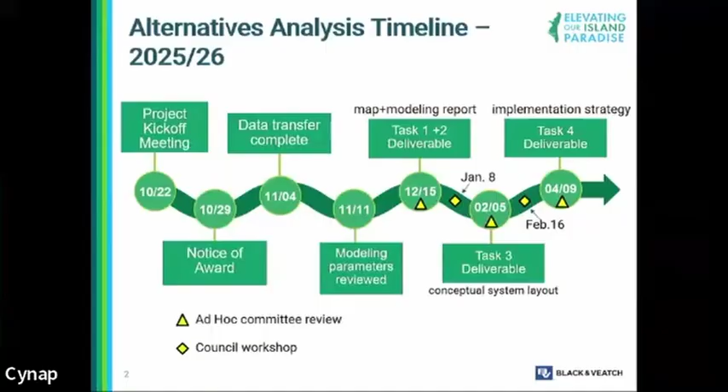Moving forward, in February we have a conceptual system layout deliverable. In between that, we're going to have workshops with council. The triangle is the ad hoc committee review, which is essentially now, then the council workshop in January, and then in February timeline, somewhere around then, we'll probably do another council workshop to discuss the conceptual system layout, and then ultimately moving forward into April with the implementation strategy, cost estimating, and final report end of April.

As far as I know, everything seems to be moving along on schedule. At some point there's going to have to be a decision as to what to do beyond that.

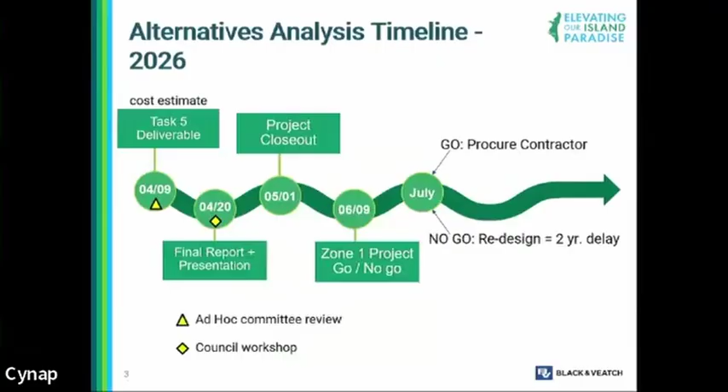In terms of the Zone 1 design as we have it now, everything's falling into place such that all the permitting will be done, all the procurement and bidding package will be done. We got the South Florida Water Management District ERP today. Financing is in place, and so then a decision will have to be made as to which direction to go as far as this effort is concerned and the management of the effort.

Sure, but I do want to add - as you set that up there, Rowan - I want to let everyone know, after a whole bunch of wrangling and a whole lot of effort, Colleen pulled off about a $13 million grant, HMGP grant, for the Garden District. So we got notified on Friday. Where's that from? HMGP is a FEMA grant. It's a FEMA thing we were expecting. Yes, but it originally went to $3 million and after, $13 million.

But that was the one that was in doubt. We had it, then we didn't - it was in very much doubt. Yes, now it's back. Yes, and so we got verbal approval on Friday, and also to her credit, the Resilient Florida application that we submitted, we're ranked number 11. Yeah, and they know that. So obviously that's contingent on the state budget, but good news.

So she's been - it's a 90% grant, we pay 10%. Yes, correct. So if we spend less, they give us less. It's up to 13 million, but it's all based on what our estimated project cost is. The original estimate was much lower than that - it was about 3.6 originally. Then it went to 7.8. Then it went up to a project cost of 14.9.

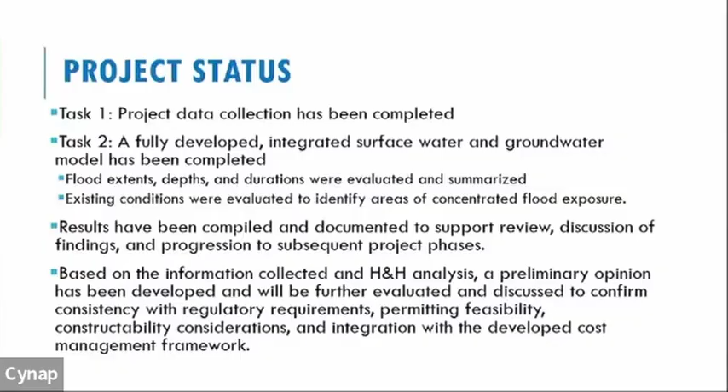Here is our timeline. We're currently in the first deliverables, and after the first tasks, we are ready to proceed with the next task, which is the conceptual network design.

The conceptual network design will require—we have developed an initial model that includes all of the infrastructure, including catch basins. We have more than 700-800 points within the model that are coupled with the surface water and with the groundwater.

When we talk about conceptual pump network design, we'll initially come up with some suggestions and implement them in the model. We'll test how they perform, then look for optimization. The conceptual network design will be the most important part of this project, because it allows us to test different conditions and see their impacts. That's really the essence of the entire work.

We're ready to proceed with that. In parallel, we have been doing preliminary budget cost estimates, and I can say that they vary significantly. I have a separate slide where we'll discuss what these variations mean and how they should be reviewed.

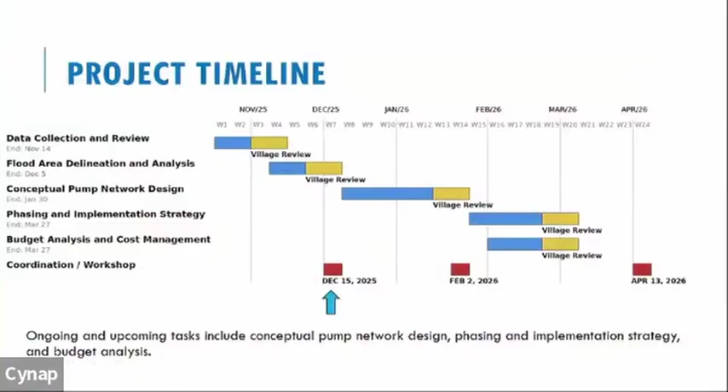The only reason I'm saying that is by looking at the golds added to the blue, I see with the first two they're overlapping, but then I don't see any overlap between 2 and 3, or between 3 and 4. So to me, the village review between 2 and 3, and 3 and 4, is going to hold you up. Is that correct? It depends on the reviewers. I think if we agree... So my next question would be, how can we speed up the review so we don't hold them up?

Well, first, these things are really more horizontal lines than vertical lines. He just did this to make it simple, but you can also see we've got the checkpoint today, which is December 15th. That's kind of a checkpoint to move forward. And then the next checkpoint is for the ad hoc committee for review on February 2nd. So you can also see that impacts when we kick off, because those are significant decision milestones that allow them to go to the next step.

So I guess the next milestone is the big one. Yeah, so not only is it just the review, it's also an opportunity for the ad hoc committee to get their presentation and see it as well. But if you were to draw this, it would be more like stripes, because we're back and forth constantly with them.

I'm sorry, continue. You said to ask questions as you went along. Yes, no, that's a good question. Thank you.

We're in the background actually working on the phasing, on the budget, and everything. We're not going to present it at this point, but we're working on it. I think what Ed's driving at is we're not holding you up with anything, as long as you're fine with us reviewing the data, because when you look at such a short-term period, it's not realistic to stop review, and I haven't worked for an agency that does that.

So conceptually, the correct thing is that we have the key milestones that we present to the council members, and that's the important portion.

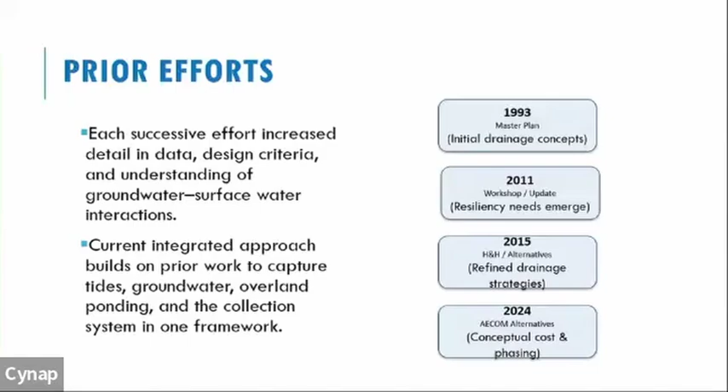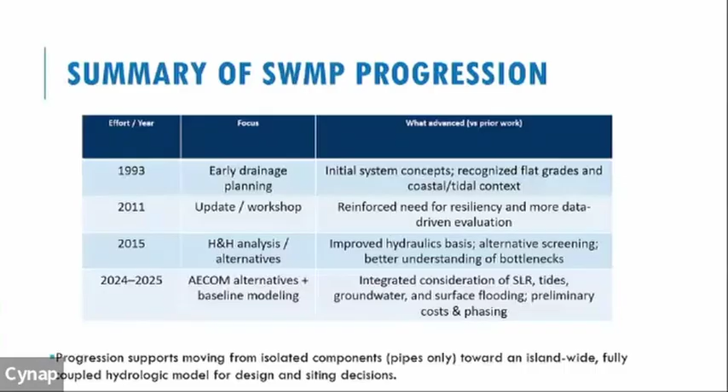And this is a summary of the Stormwater Master Plan progression. We have utilized the data from all the previous studies, and this is the basis of our analysis.

It's important to mention, because we're talking about this modeling, that we're not simply looking at this as another modeling exercise, but we're looking into adding the entire hydrological cycle. There are multiple reasons for the need to include the entire hydrological cycle—meaning the tidal effects, the groundwater, and the evapotranspiration have to be included. Being in a tropical island, evapotranspiration is one of the main components of the water budget; even though it doesn't directly participate in flooding, it's essential to maintain the balance in the soils, so that's also added.

Can I ask you a brief question? When you mentioned the hydrological cycle, one valuable discussion held in the past in this council has been the fact that we are going with standardized curves done by the South Florida Water Management District that were set in 1960. You know that, right? The 25-year, 3-day. One of the things I remember when we did the first stormwater master plan was that we wanted those curves to be reevaluated.

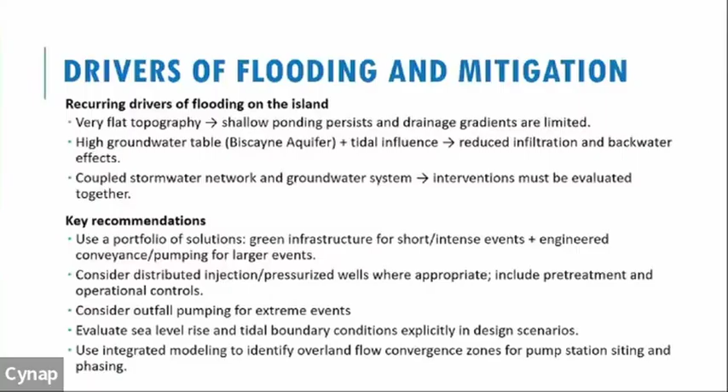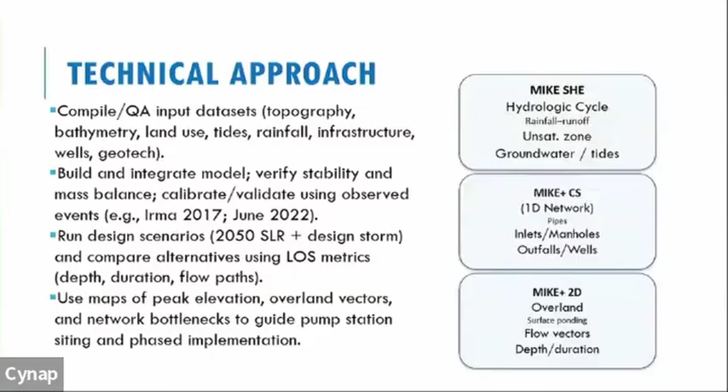But the hydrological cycle of Mike She, are you using that for sea level rise too? For Mike She, yes, we're using it. Is the sea level rise an exponential rise, or more of a chaotic, stochastic rise? I have a little slide. I'm looking at where we looked at the intermediate as per the RFQ, and I'll show you a slide.

We downloaded all of the data from Virginia Key and placed it. It looks so far linear, so it's more going through the low intermediate. But considering we have a very short period of analysis, it's only preliminary.

So the full hydrological cycle is needed because the groundwater, the superficial aquifer, contains the Biscayne aquifer. We know that it's very pervious, so that's a positive aspect as well. Even for injection, you have less resistance, so you can have higher rates.

The tides are important to include because they basically propagate through the groundwater, and the tidal elevation causes groundwater elevation to rise. So for the design, we needed a model that provides a solution to analyze the tidal conditions, the groundwater conditions, the surface conditions, and the network—all four components.

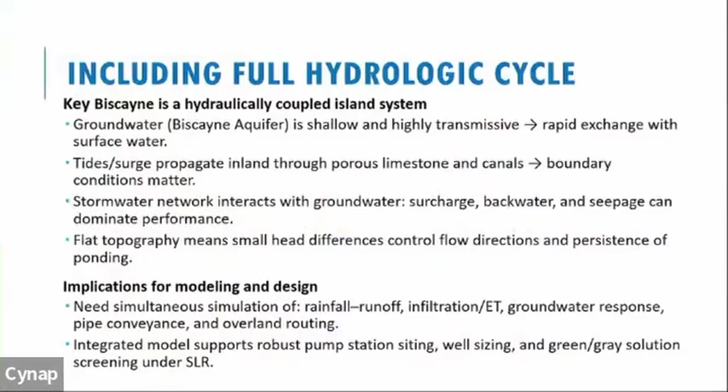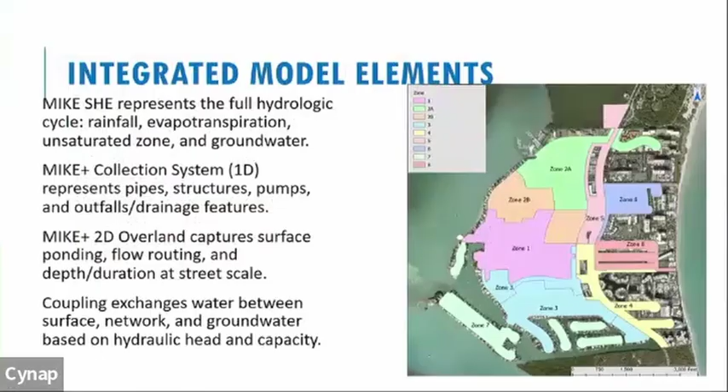So the integrated components include all three of these. This is the original zoning developed by AECOM. Here are the model boundaries in this slide—I show the model.

The blue areas are the model boundaries, and you can see we went through to the coastal area because this enables us to provide the impact of the tidal conditions. We also went to the north, where there are wetlands, because if there's a way some of the flows can be stored, a storage area could be developed there for analysis.

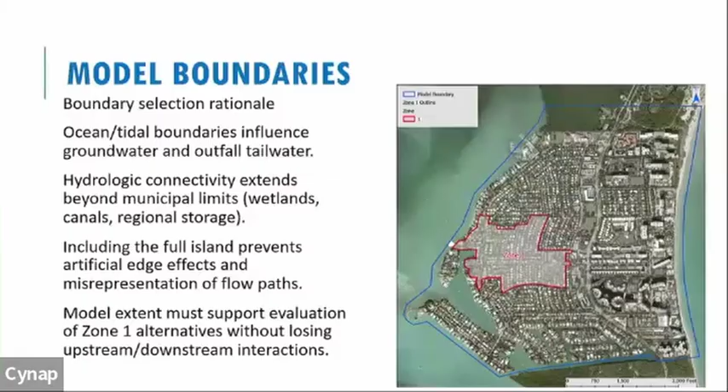One reason to include the full island area is because in this flat area it's impossible to define watersheds. Also, this model is discretized at 500 by 500—actually more, 1600 by 1600 cells—meaning we have a discretization of 5 feet, very detailed. That's a sufficient level of detail to model the topography on the streets as well, giving us detailed analysis of the flows on the streets.

For the data sources, we only use published data. Topography, bathymetry, and land use are from Miami-Dade County. Land use from Miami-Dade County is a bit different from South Florida Water Management District's, which is more vegetation-oriented—land use here is more urbanized.

The tidal data is from the NOAA tidal station. For rainfall, we use Atlas 14 for the event, but distribution is based on South Florida Water Management District distribution. For groundwater modeling, there are no groundwater monitoring wells—that's something we are extracting from the model.

We can define that: the stormwater network, the as-builts, AECOM data sets, and also the most recent KCI survey. It provides a very detailed topography and infrastructure survey, which we entirely used. However, it was deficient in the north and the south. We only received the intermediate side, the medium, which covers entirely zone 1. We're still expecting additional data, so we will provide refinements of the model to the north and south as we receive them. They promised, and we received the latest data from KCI in November, just a couple of weeks ago. They will be providing additional data for phase 2.

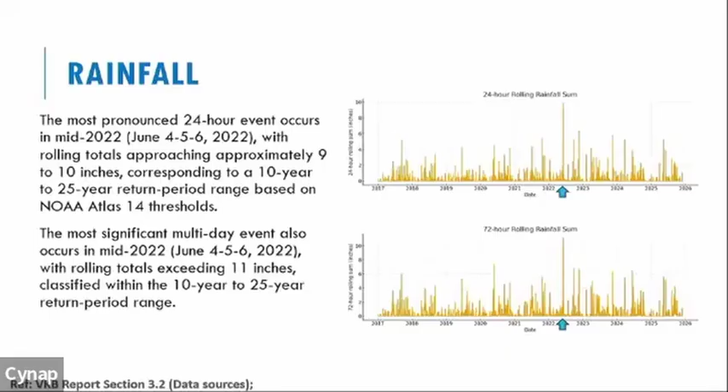But the point you're making is the intensity. That's where I'm going. Everybody knows a hydrograph is a parabolic curve. If you were to develop a hydrograph, the peak of the storm, we know what the South Florida one is because you develop it from the intensity, etc. If you were to do the same thing for Key Biscayne, would they overlap? Think of two parabolic curves, one from South Florida and one from Key Biscayne.

They would not overlap, for sure. They would be different, but it would be scientifically correct based on data. Scientifically correct in the aspect that this event is classified as almost a 25-year event. The total rainfall is classified by... more or less. That's what I'm trying to understand. Maybe I shouldn't have asked the question.

Because there are two aspects: one is the rainfall depth, and the other is the distribution. So if you have a rainfall depth of 10 inches, it can occur randomly and accumulate over 24 hours to 10 inches. But it can also occur synthetically, like a smooth curve, which is the South Florida district approach, and still accumulate to 10 inches. So that's the difference. But within the curve, they will show different intensities.

So the intensity is something that would be different. Otherwise, would the rainfall depth be more or less? In the South Florida Water Management District, it will be more. In Key Biscayne, it would be less, most likely. Most likely, yes, because in general, the South Florida Water Management District developed the rainfall analysis in the 90s and haven't developed anything since.

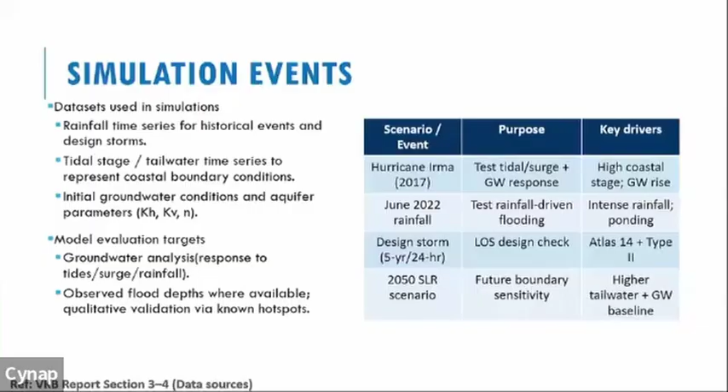And it falls more or less between NOAA intermediate low and NOAA intermediate - which is the one we adopted, NOAA intermediate. So I think it's a good choice for now, versus low intermediate or high. The point is that sea level rise has to be monitored continuously, and adaptation is necessary eventually if it increases.

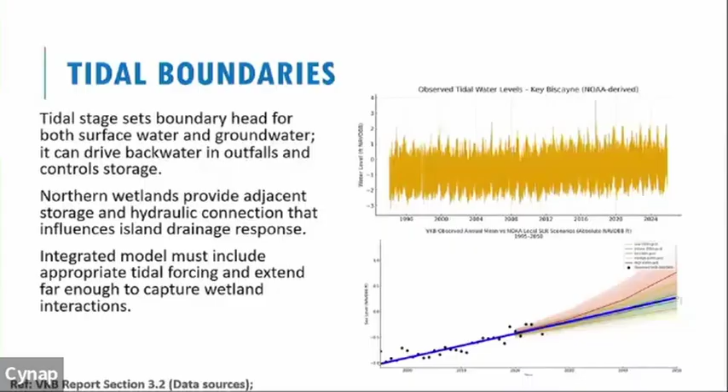I'll continue with this - the data sources of the hydraulics. I mentioned there were 3 basic sources, all bringing different components: the KCI survey from November 2025, a couple of weeks ago; Miami-Dade County and FDOT, who also provide some data, mainly along Crandon Boulevard where it's their responsibility; and the GIS data for the Village of Key Biscayne, which supplemented these areas and the lower areas. You can see the density of the network that was designed by KCI.

One thing that's important to note: in the civil drawing, there were 210 catch basins. According to the survey, 136 appear to be plugged - this is a significant number currently plugged or not functioning, or functioning at less than full capacity. This is by the KCI survey, noted in their drawing. But does plug mean 90% plugged, 50% plugged?

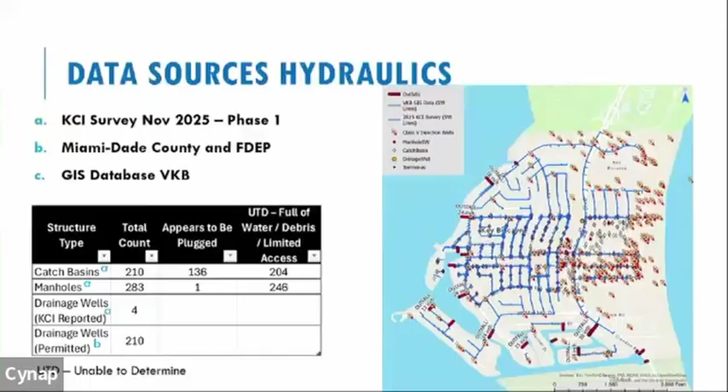This data says drainage wells, we're saying 4, but these are actually 4 injection wells. So we're calling them drainage, they're calling it drainage, but they're 4 injection wells - drainage gravity or drainage injection, two types. Are there any of them usable? I mean, gravity wells obviously you have to have a natural head to drain and you have to overcome the pressure coming out.

Are there any of these salvageable for... I mean, pressurized? They can be converted if we wanted to. Conversion is possible - I have listed a project here that was recently done in Sunny Isles, conversion of a gravity well into an injection well. This is something that's being done with a small pump, and that's an example, this was done very recently. In terms of cost and everything, it's a good example.

For localized flooding though, I mean obviously - yes, for localized. Because one thing that people need to know, and that's important, is that these wells are spread throughout the village. The area we're focusing on is a specific area where I don't think there's wells there, but it could help other areas in other locations.

Zone 1 has 6 pressure wells, 6 out of 34 - we got them on the map. Right, but what I'm asking is more of a generalized village-wide question. Can we, in an effort to help spot flooding in other areas in the village - because we're not going to be doing this all over the place, at least we've got to get through this one first - but in the meantime, can we use some of those wells, pressurize them, and alleviate some of the flooding happening upstream or in other locations.

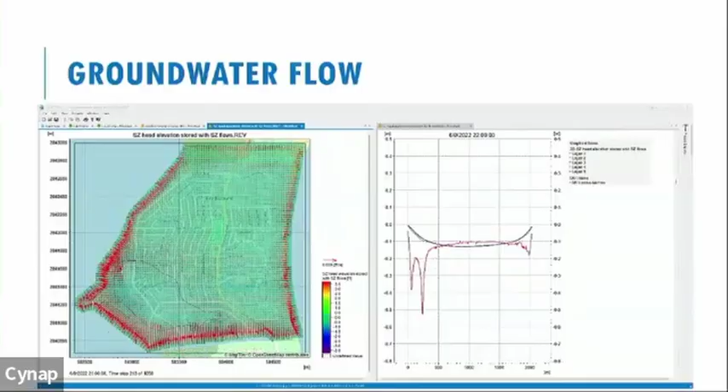So I think that's an interesting factor in our analysis. What's tidal? Giorgio, when you talk about mounding, are you talking about the increase in hydraulic head that's required to push the water down?

For the mounding, this is a special design criterion - when you inject a well, you inject the fluid in the well, the groundwater table can increase around it. There is a limit, I believe, of 0.5 feet - once you start injecting into this well, you cannot increase the adjacent groundwater more than 0.5 feet. Otherwise, it would not be permitted. For all these underground injection wells, there is a limit.

And also, if you put too many wells next to each other, they interconnect and they will cause the groundwater to increase more than necessary. So the tidal condition dynamics, I think this is also important to know and needs to be a part of the analysis of the pumping or the wells. It's important to know that all of the tidal conditions are included in this analysis.

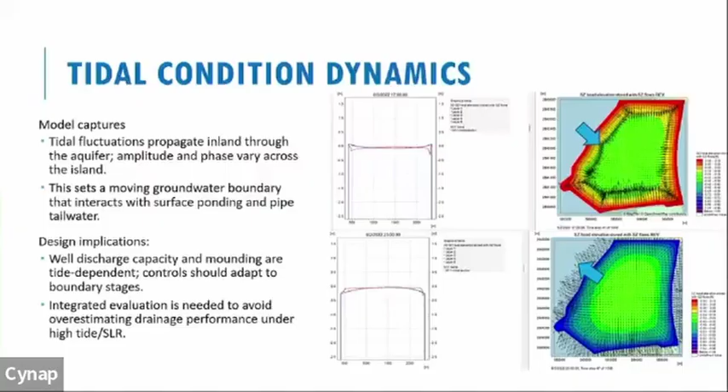Now that's critical for future permitting. If you apply for permitting for this underground injection control, or for FDEP, or for South Florida Water Management District, or for Miami-Dade County, that's a critical factor to reflect tidal conditions.

Also wanted to mention the groundwater levels, how they fluctuate. The groundwater levels during September, Hurricane Irma, this is a point right next to the school - this is a modeling result, not an actual measurement. It went all the way, almost up to 1 foot, but the tidal was 3.5 feet. This was the storm surge.

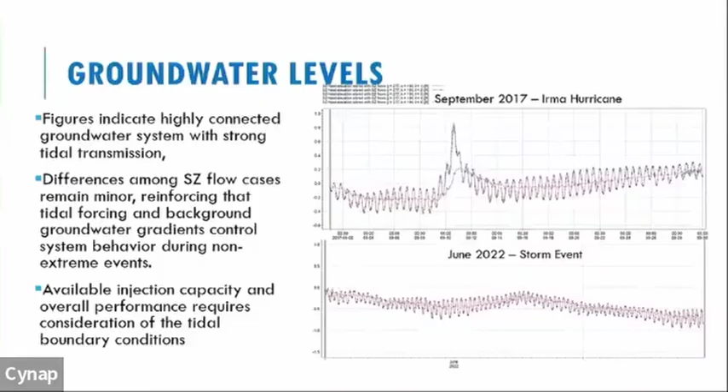And in general, it behaves fairly normal, but it is affected by the tidal conditions. Available injection capacity and overall performance require consideration of the tidal condition. So that's something we will be able to address.

Now, this is the storm event in June 2022. This figure shows, even though it's very small, the rainfall that occurred on day 1, day 2, day 3, day 4, 5, 6. So there was a long stretch of 7 days of rainfall, which caused significant flooding.

And this illustrates how this flooding developed. You can see the tidal impact from outside the island, and you can see there is a uniform flooding on all streets - basically uniform. They are the lowest portion of the land, the streets, so they collect quite a bit of water.

Now, this figure also included the flow directions. I think flow directions are a significant factor in the entire analysis, because without flow... here is the flow direction in detail within the school, within the K1 zone. The flow directions actually provide the flow paths that develop during rainfall.

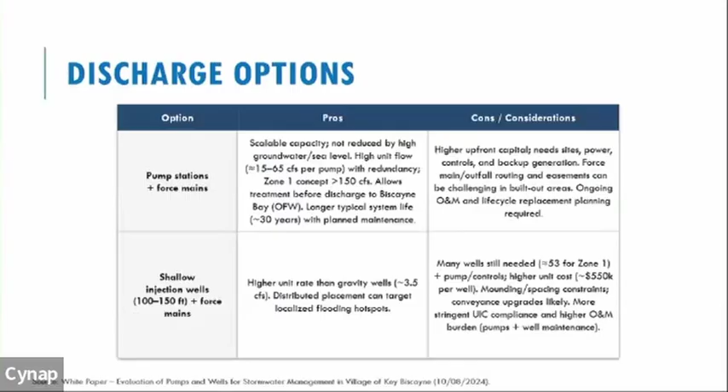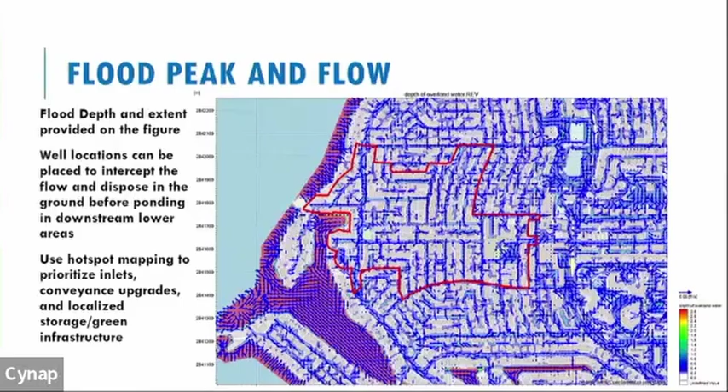Hopefully that will mitigate local flooding. The final level is pump stations or force mains that will pump. We're conceptualizing the pressurized groundwater wells and the pump station pressurizing those, to be connected to a SCADA system at some point to switch to the outfall if the pressure is exceeded or any regulatory factors apply.

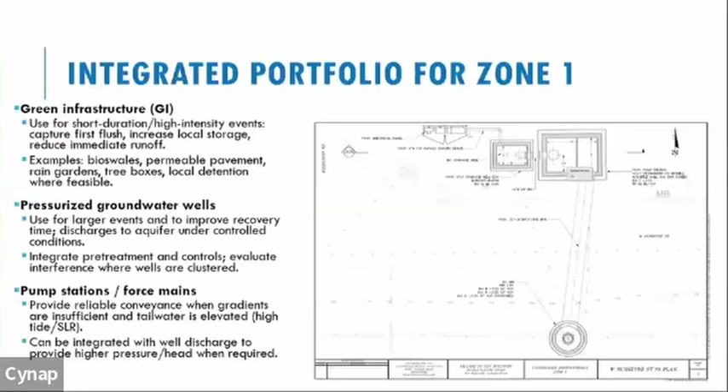I have it further down. I highlighted items, and maybe what we can do is distribute this presentation, because I have a long list of items that we are going through.

Just to back up - Giorgio, how did you confirm these flow directions? In this model, that's computed by the model. Oh, I'm not worried. So we just trust the model has the flow directions going correctly, but there's no way to really confirm these flow directions?

I would not doubt this model because, for example, you have a topography that's discretized to about 5 feet, and it's a very detailed LiDAR topography. So if we need to justify these flow directions, one aspect would be depending on the gradient, the slope of the topography. This gradient may reverse depending on the event - if you have street flooding in that direction and it exceeds the elevation.

The only reason I ask is because everything has to basically flow towards the well. You've got to confirm that the well placements are relative to the correct flow direction. If there's no specific way to confirm the flow direction, then it's like using a model that hasn't been calibrated or validated - you can't just assume the model is getting the flow direction right, you have to actually confirm it.

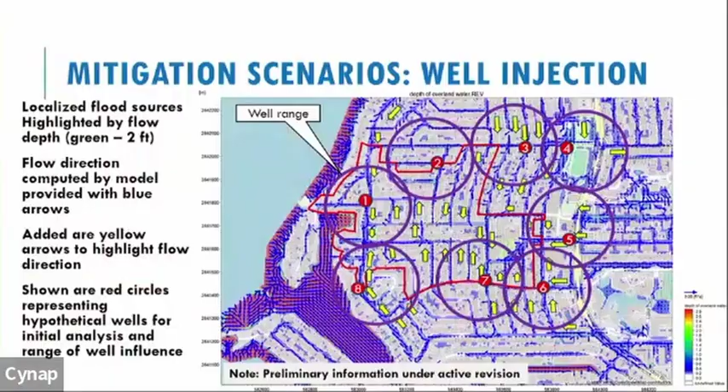So yeah, that would be next, optimization of these. This is just the preliminary, conceptual idea of how this may work.

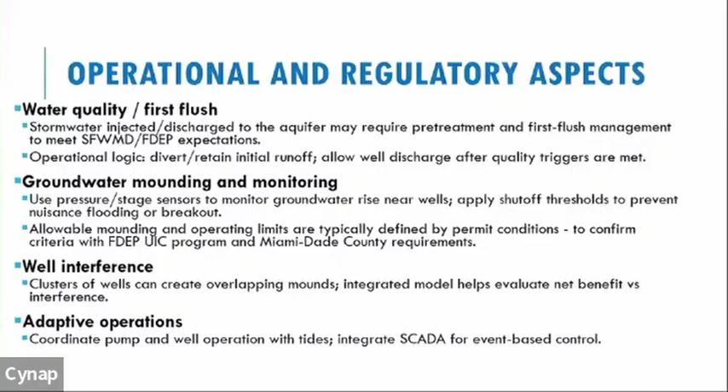There are operational and regulatory aspects in using wells, so we will be looking into those, including well interferences. Adaptive operations may be needed based on the events. Include life cycle maintenance here too. Groundwater mounding and monitoring. Yes, life cycle.

I have a whole list of items that I will provide to you in this presentation. After, we can discuss it, or it's a really long list of things that need to be considered.

In terms of cost management, we had a review of the various costs associated with pumping, and South Florida Water Management District gives you, for a pump station that's less than 250, it costs 68,000 per CFS.

That's their general guidance, but things are not so simple when they go into urban areas, because there's a lot of restoration and other aspects. In order to provide the costs, we need to finalize the proposed location for wells and have the exact configuration, and then a cost can be determined accurately.

Because as you can see, these costs vary. Sunny Isles, which I was reviewing recently, was 1.47 million for 11 CFS, with a lot of restoration around. That's per well, Giorgio? Or is that for 11 CFS with two wells, 1.5 million, with two wells converted from simple gravity drainage wells to injection wells. That means excavated, and so this is with two wells.

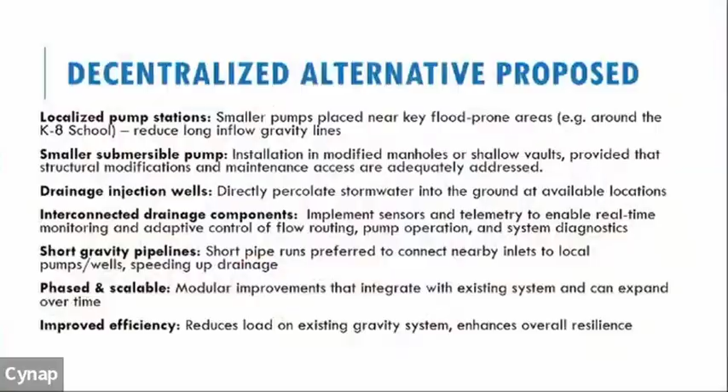So our suggestion was to use the decentralized alternative to analyze as the decentralized alternative. We're not requesting any decision, this is just for the analysis.

There are multiple items we identified that need to be added and included: optimization analysis, road raising alternatives, county flood criteria requirements. Again, the county flood criteria requires that any new or substantially upgraded property has to be elevated at least 6 feet. The parcel has to be elevated 6 feet. They have another requirement for the road.

Integration with landscaping, I think, is a critical aspect, as this stormwater work continues. Landscaping is very important. You remember that initially the drainage was conducted using imported plants from Australia with high rate uptake, so they're like the most significant pump, taking water from the ground and sending it to the air on top of everything. So landscape is important. Phasing, we need to work on a phasing.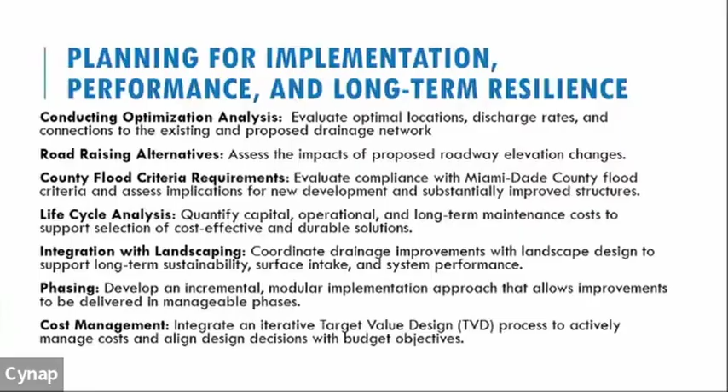Cost management, we're proposing to integrate an iterative target value design. What this means is, as you design aspects, you also calculate the costs, and then you iterate, and review these costs and provide feedback, and then if necessary, the design should be changed.

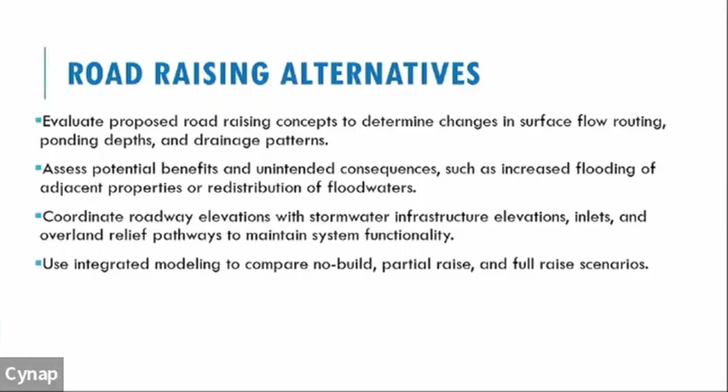I have details about conducting optimization analysis, multiple slides here. I'm not going to go through all of these, but these are more details. I don't know, however you feel, however the committee feels.

I get the picture that we are looking at two different technical philosophies or solutions. That doesn't necessarily mean we have to stop or that we need to continue forward, but I think this looks at risk more honed into where the problems are.

Again, I agree that the boundary conditions, after seeing this, at least in concept, feel to me like they drive the flooding more than the rainfall, even on a day-to-day recurring basis. That doesn't mean we don't need a sturdy pipe system to take the water out. You agree with that? It doesn't eliminate that fact.

So the question, more for council later, is how we need to continue to evaluate this further. You need to give us better ideas on where the risk is and how to manage it, and we need to figure out what to do with what we've already spent and invested in.

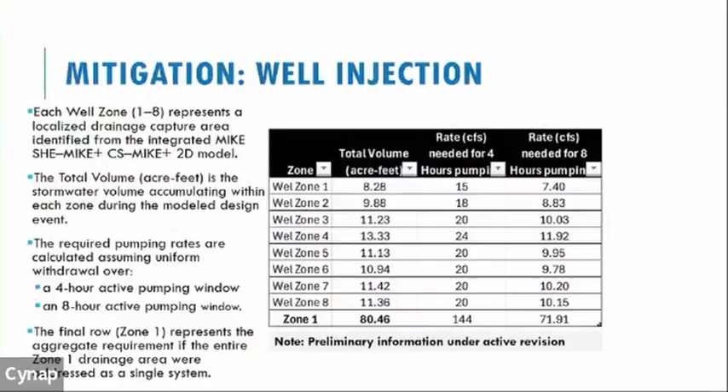So you're saying it's 15 - basically, do I just arithmetically say if it's 4 hours at 15, that means I need 60 CFS? No, it says you need 15 CFS to remove this amount of water from this area for 4 hours, for that level of service. So it's a little bit different, down to zero.

And that's what I mentioned, that we can relax these. No, I understand. And this is also based on the 2020 peak storm - that was a 10-inch storm. Can you do me a favor? I understand.

So, got it. Is this available for us to take home? Yeah, I'd like to take a package of this home so I can take a look at it. Can we do further assessment on this? I would like to understand.

We're done, Mike? Yeah, I think we're getting ready. That would also be good - we're looking for guidance on what exactly the council... you're seeing this, professor, not us. Well, you're the owner, so - yeah, it's not me. If we knew what to do, you wouldn't be here, okay?

We have a suggested path forward, and the main thing is to introduce these wells, and we'll conduct all the design events as we like. This is the calibration event, and the design events are 6.56 inches. Also, as typically done for these models, we'll do the 10-year event, 25-year, 100-year event, because sometimes for FEMA analysis they ask for 100 and 500. So we'll do this range, but it's not the primary thing.

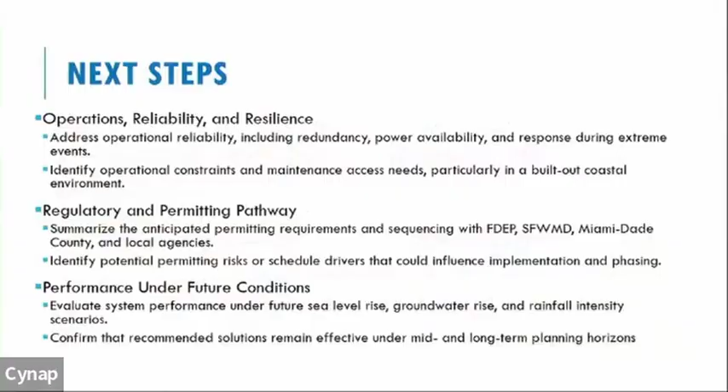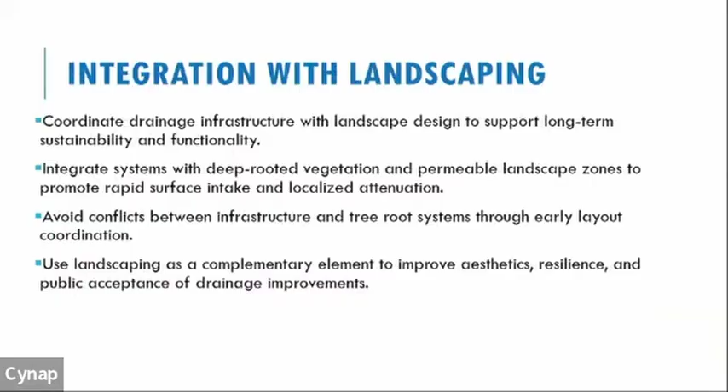I have a whole list of writing here of what needs to go, like, at the end of the presentation. I did not go through this, but I think you're ahead of ourselves right now with landscape. This is something we'll need to address subsequently, and we'll be addressing it.

We'll also provide an approximate footprint based on the reintegration of drainage wells into injection wells, including the pumps and the pump footprint, the electric panels, all these chambers. We'll provide that so we can look at the right of ways and where these can be placed.

Excellent. Another last question.

In 10 years you had one event with 10 inches of rain, whatever it was. The rest of the time, 6 inches. So what's the ballpark, approximate difference in cost between designing for 6 inches versus 10 inches? If you have one event of 10 inches in 10 years, you probably shouldn't even design for that. So do you design for 6 inches, and when you get a 10 inch event, say you'll just suffer through it? Or do you spend the money and design for the 10 inches, which will happen once in 10 years? The water management district is telling us 6 inches.

Isn't that the highest requirement? We'd be designing for 6 because that's the water management requirement. I'm just asking what the difference in cost is. I'm just trying to get a ballpark in my head. Is it a significant difference? Is it because it's two-thirds bigger? Is it two-thirds more the cost, or is it ten times the cost?

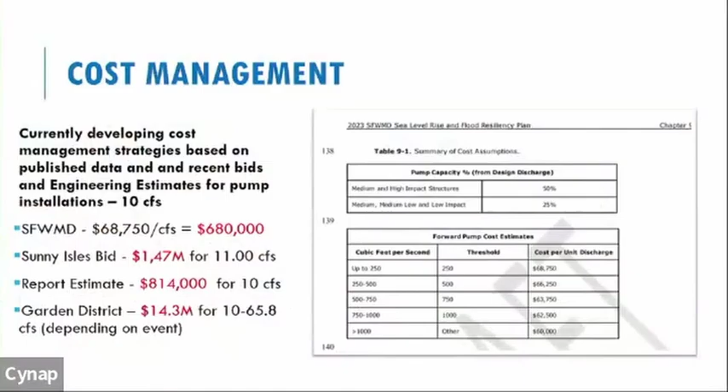So the 14.3 figure, if you look at this, refers to peak flows of 65 CFS. But that's not really correct. I have a problem with this. Why is it not correct? I don't want to get into it, but I have a problem with this whole thing. Talk with Colleen.

I don't want to get into that now, but it's something we have to look at, that's all I'm saying. We have to look into this thing. I think it's far better to get a feel from recent CIPs, look at Miami Beach, look at Fort Lauderdale, look at what they built, and let's come up with that. I don't want to go by CFS, that one thing has nothing to do with the other.

My suggestion is, I have a problem with this whole thing. I would just recommend talking to the different municipalities. Let's reach out, and all I'm doing is bringing it up as a concern. They can give us bid numbers, and they can give us costs to build, so we know. Agreed.

So this is wrong. No, it's not wrong, it's just the first shot. It's a different way to compare it. Just don't use CFS. We're building, it's construction.

I absolutely agree, because if you look at South Florida Water Management, the way they cost their pump stations is different. You should have a wealth of data across the bay, the beach, Fort Lauderdale, they'll give you all the information. They've been building this stuff. Even Miami right now is building. Maybe the water management districts are using 1970s costs too. I don't know how you do it.